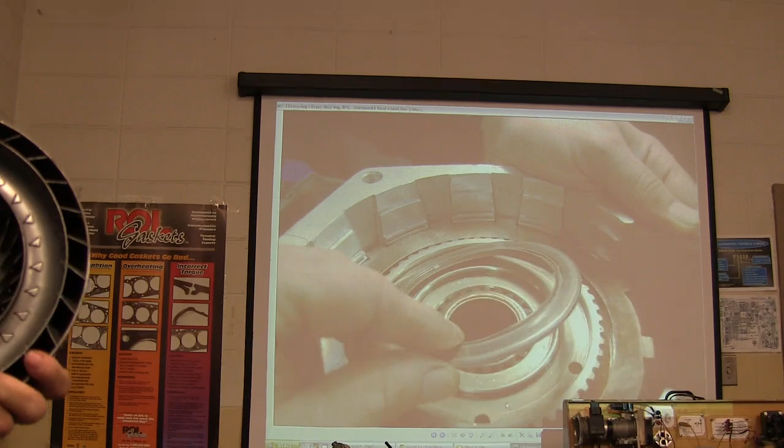Make sure you recognize the fact that the turbine shaft goes here, right? The turbine shaft, the little shaft that comes out the front. If a transmission is built the right way, remember this when you put that one back together, you ought to be able to grab that turbine shaft with your hand and turn it. If it's locked up and it won't move, then you're going to go back in there.

This one here, something else that happens, these splines get stripped. You can totally miss that. It won't show up on the turbine shaft. The turbine shaft is harder than this thing, typically. If it wipes this out, where does all of that metal go? Where does the oil go when it leaves the torque converter? Where's the first place it goes?

Nope. It goes to the cooler. Because where's the heat in an automatic transmission created? In the torque converter. Because it's shearing this oil, right? Now, you ever see somebody sit out there in a traffic jam on a hot day for a long time with a car in drive, and all of a sudden it starts puking transmission fluid out? Why would it do that?

Well, because it's shearing the fluid, and it gets hotter and hotter and hotter because they're in drive. And the hotter it gets, the more it starts to boil, the fluid starts to expand more and more. The next thing you know, it's puking out the vent and going all over the road. And they said, oh no, I've developed a transmission leak. Well, basically they're cooking the fluid.

When the fluid starts to get hot, like if you're pulling a heavy load a long way, and it's having to shear the fluid a lot, that fluid starts to change properties. And it starts to plant varnish all over everything. And it starts to get stinky and smelly. And it starts to cause valves to stick. And there's just all kinds of stuff that goes crazy.

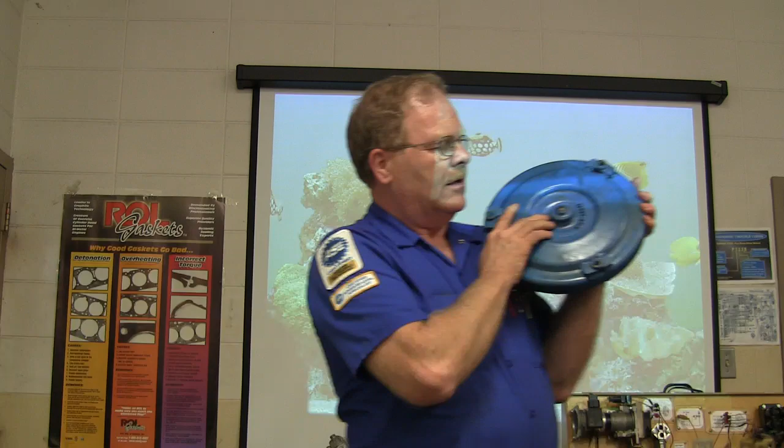You see, sometimes, well, right here, where does this go? This is the torque converter. Where's it go? It goes into the transmission and the pump. That's right, and this slot here turns your pump, right? Okay, so if you ever pull an engine out or a transmission out for whatever reason, like if you got to pull a transmission out, you got to put a rear main seal in the engine.

And this transmission, this is an older vehicle. This is the seal around here, right? And the torque converter has been supported because it's bolted to the engine. Well, now you leave your transmission sitting over there while you're waiting for your parts. A lot of times it'll distort that seal. So you need to pull this torque converter out of there and make sure that that seal is okay. Might not be a bad idea, just go ahead and put one in it.

But on the ones like you guys are working on over there, that front seal that goes around here, it's got a little sort of a cage thing that bites into the front of the pump you put on there, because if you don't put that back on there, the pressure that's behind that seal will blow that seal out of there every time. So what you got to do is make sure you put that cage back on there and it's staked really good.

The seal, and that's on the 4L60E like you're working on. That'll blow that seal out of there. It won't do that on any other transmission I know about, but that 4L60E is bad to do that. And so that's the deal on that. However, I got another picture here I want to show you. If I can get past my fish.

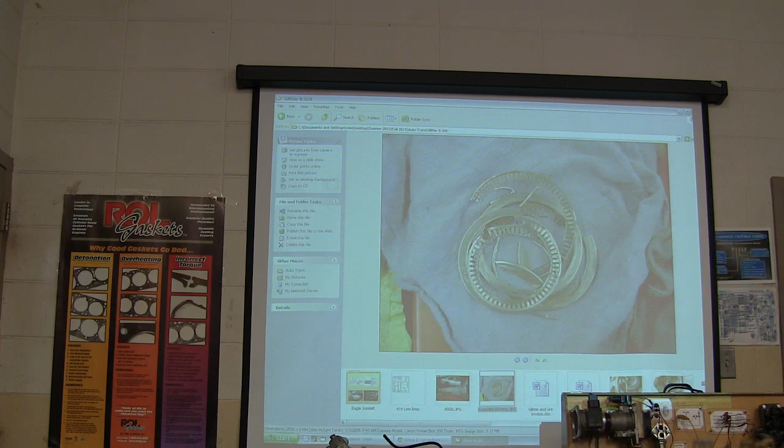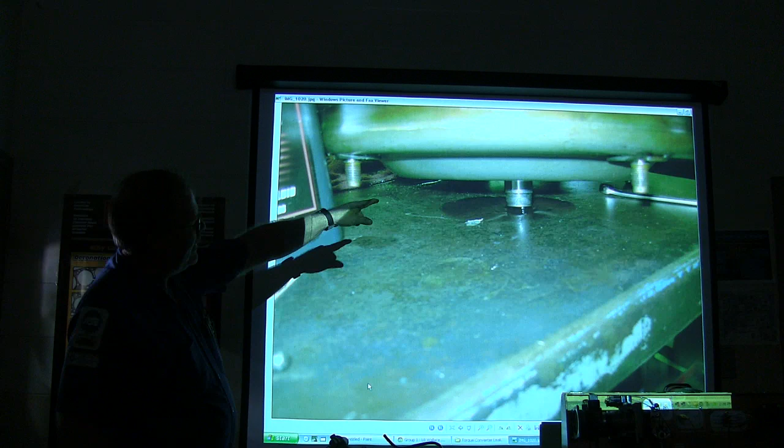Because when I was at the Lincoln Mercury place in 1984, there was a guy that worked and worked and worked on that. And he had a torque converter that was leaking that he would have sworn was the front pump seal. Well, what do you see about this? That torque converter, that goes up in the back of the crankshaft, right? Or up in the, you know, where I'm talking about the flywheel. This is the flywheel end of that thing. See it leaking there?

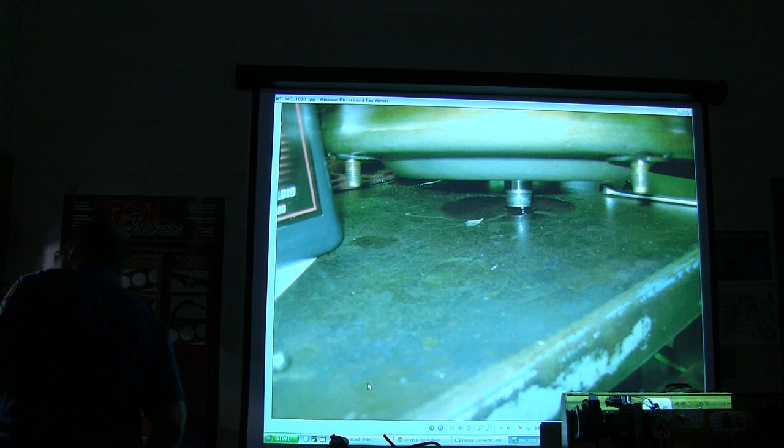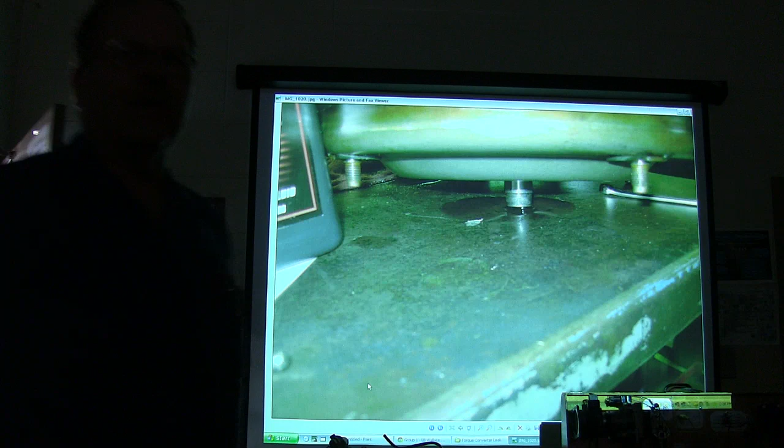See it leaking? I'm in here doing a little talk here if you want to come in. But right here, where do you think that leak's coming from? We laid the torque converter up on the bench. Do you see any oil anywhere else? It looks like it's coming out the end of the shaft and goes up in the motor. It actually is. There's a crack there. Right?

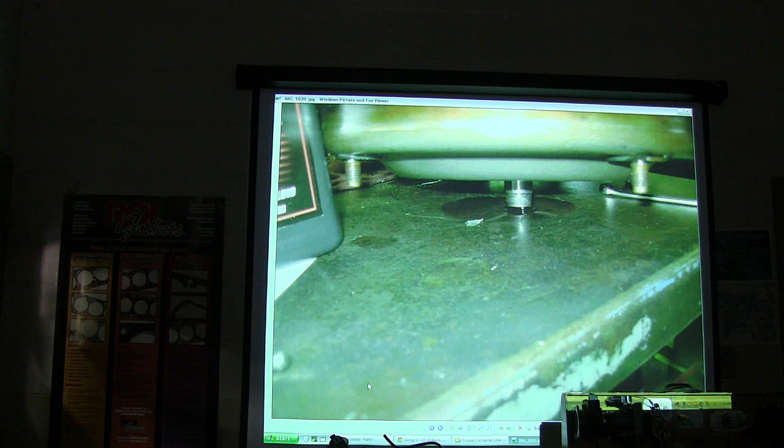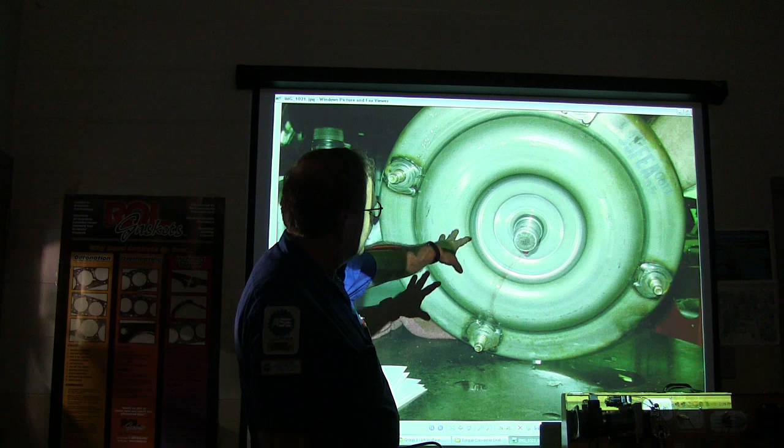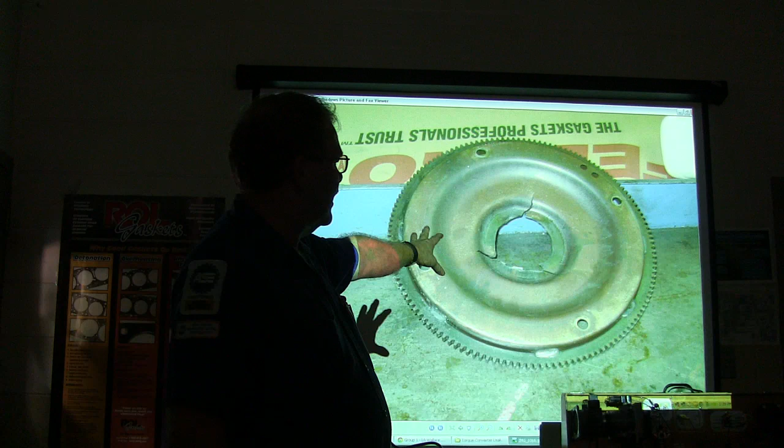See that leak? Drive you nuts. You can't see anything except that there's fluid there. That's how fine that little crack is. All right? That's why it did that. Now what happens is sometimes that flywheel will crack like that, and the torque converter loses its support. But it'll still keep driving because that's a ragged sort of a crack.

And what is another name for this part up here that you're looking at? What else do they call it? Got another name for it? Flex plate. Why do they call it a flex plate? What happens when the engine starts spinning this? What's that going into? That's going into the pump. What's the pump doing? Where's the first place the fluid goes when it leaves the pump? The very first place the fluid goes when it leaves the pump is in here. And it goes in there with a heck of a lot of pressure.

Now you got a pressure control solenoid, and you've also got a pressure relief valve, which basically is going to keep it from going too high. But as thick as this is, and that is a thick piece of metal right there, in case you hadn't picked this thing up, that's pretty darn thick. I mean, it's thick and it's heavy. It swells the converter a little bit. And when it swells the converter a little bit, it flexes that plate. And as it flexes that plate, it winds up

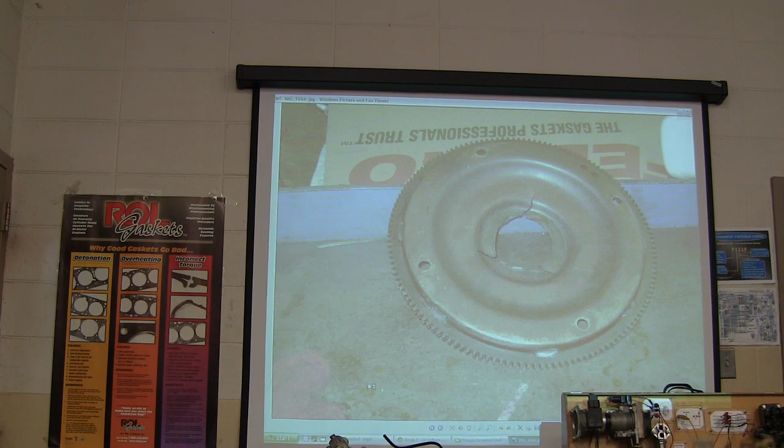cracking flywheels. Every one of these is a cracked flywheel. There's you a cracked flywheel. Hand that one there to somebody else. That's a cracked flywheel. And that's a cracked flywheel. Every doggone one of these flywheels is cracked. And they were cracked because the torque converter continued to expand around where it's bolted to the crankshaft.

And what you're going to hear before you do anything else is a click, click, click noise that sounds like an engine noise that's up in the bell housing area. If you listen with a stethoscope into the bell housing area and you hear a clicking noise, this is what you're hunting. Now the one with the arrows on it, right over there, came out of a 2000 model Chevrolet pickup with a 6-liter in it. That's a Silverado. Jimmy Hutto drives it. It's his personal truck. The simple fact is, he was hearing a noise he thought was an engine noise, and it was a flywheel noise.

So you can see them little cracks in there. This one here is an extreme case of it. But if it cracks the right way, even if it breaks completely out, you're going to have more. That's the truck right there. That's the black truck that it came out of.

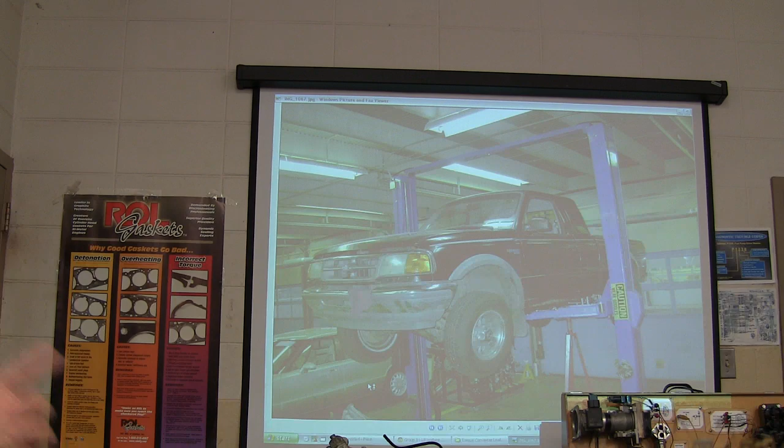Now, another thing that happened, the center was busted out of that flywheel, but when they took the bolts out, whoever took the bolts out fooled around and left the doggone busted off piece of a flywheel up there, and then put the other flywheel up there on top of it. That caused some trouble too, you can imagine. So it had to come back out. But anyway, that's the one right there. I was going to show you about that. Okay. That torque converter was bound up in it. I didn't realize it. Yeah. Well, that's right. It did. I mean, that's what I'm saying.

All right. So here's another one. Now this one right here is a different deal. My boy Jimmy was working on this one over at the Ford place. This is another war story. I know you guys love war stories. And there was a Lincoln that came in there.

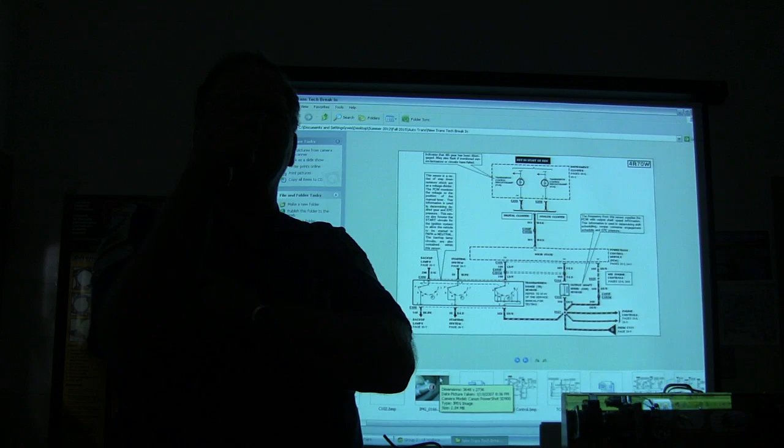You know this overdrive cancel switch on the end of the stalk? What does that do? What's that for? When you pull in a trailer? Huh? You pull in a trailer, it cuts... Oh, what exactly does it do when you push that button though? Disengage. Takes out a gear. Anybody know? I'm probably gonna hit you guys tomorrow with another one of these draw on the board and tell me things, so be paying attention. Okay, when you push that button, that light comes on, doesn't it? Does that button turn that light on?

No. The button actually sends a 12-volt signal to a particular pin on the engine controller. The engine controller receives that signal and then turns the light on. So you're not turning on the light when you mash the button. You're telling the engine controller to disengage fourth gear, which is your overdrive gear, right? So that you won't be overloading.

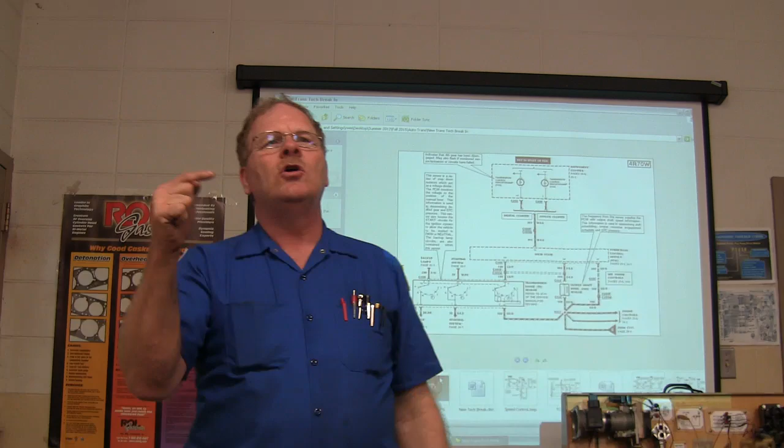What happens if you're driving a car and you're in too high of a gear? Burns up. Well, it just has trouble. You know, the engine's actually overstraining. It's not in its power curve. You want the engine to stay in its power curve, so you want to stay in a lower gear so you can pull the trailer better. Basically you don't want to put any undue strain on any components.

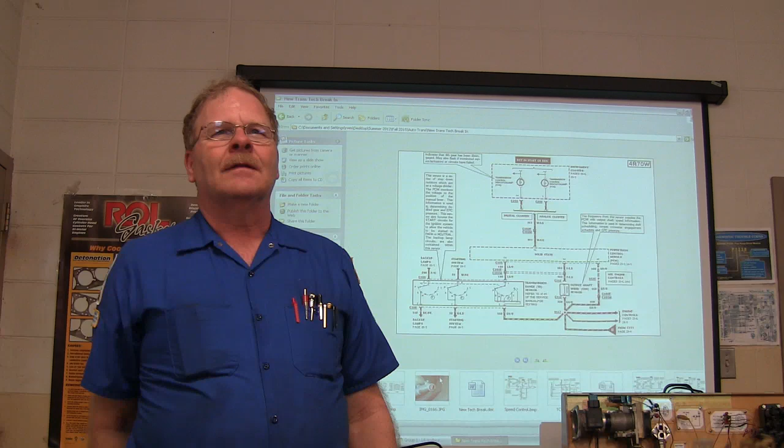Well, listen, he's got a Lincoln that turns on its own overdrive light. When you mash the button on the end of the stalk on that Lincoln, like if you're in hilly country, driving in mountains, you basically want to turn off overdrive so it's not hunting all the time, right? Okay, so you push that button, but the Lincoln driver is not pushing the button, and the light's coming on by itself. Is it the button line or PCM line? Well, the button ain't being pushed, but the PCM.

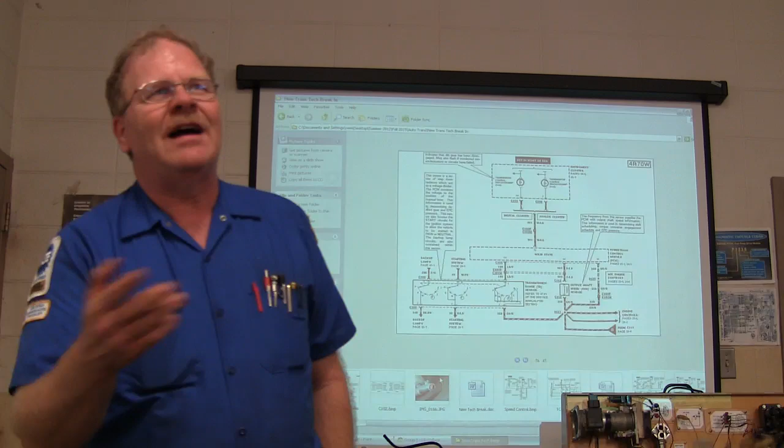So Jimmy's checked everything he could, wire harnesses as far as he could tell and all that. And he's scratching his head, and he gets a PCM. Plugs it in there, drives it around. Before he's been driving it for 30 minutes, the light comes on again. Now, how much would you pay? Like the pitch man says. We've already sold a PCM we didn't need, and we got the same problem we had. And this is not something that's going to escape notice. If they're driving and they look over at that overdrive light and they didn't push the button, it's back on. You're never going to believe what he found.

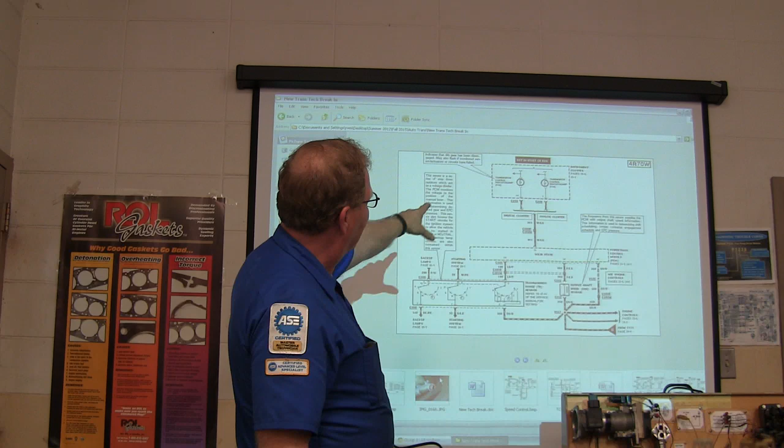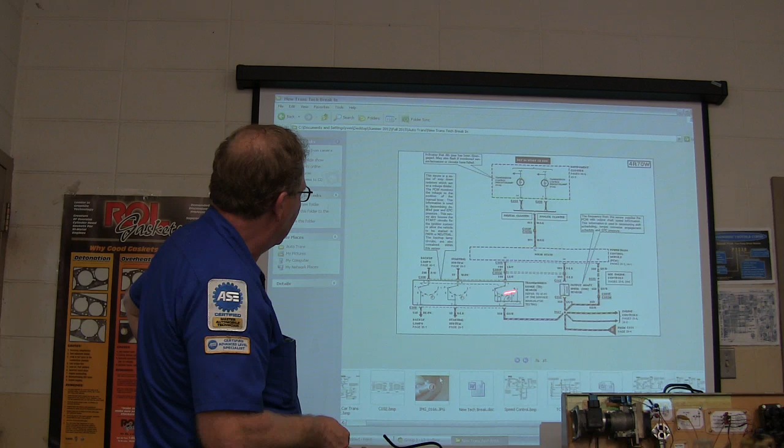He's tracking the wire harness. See the wire schematic right here? There's your transmission control indicator lamp. Now you might notice this represents alternate current paths, like for an analog cluster or digital cluster. Powertrain control module. Okay, so this indicator lamp, there's the switch here. Where's the switch? We're missing a switch somewhere. See a switch?

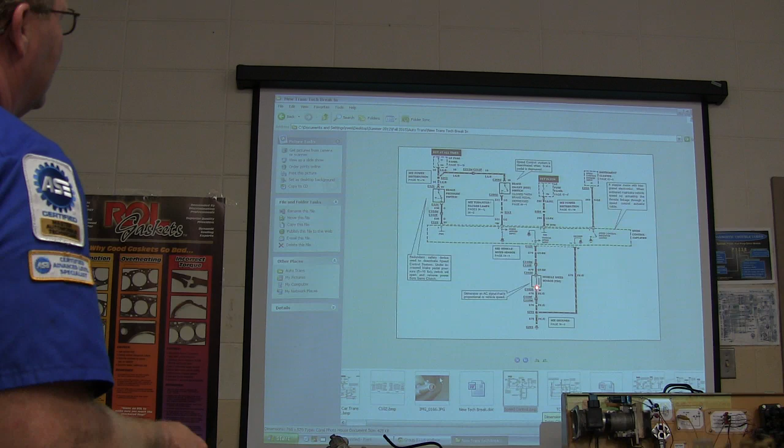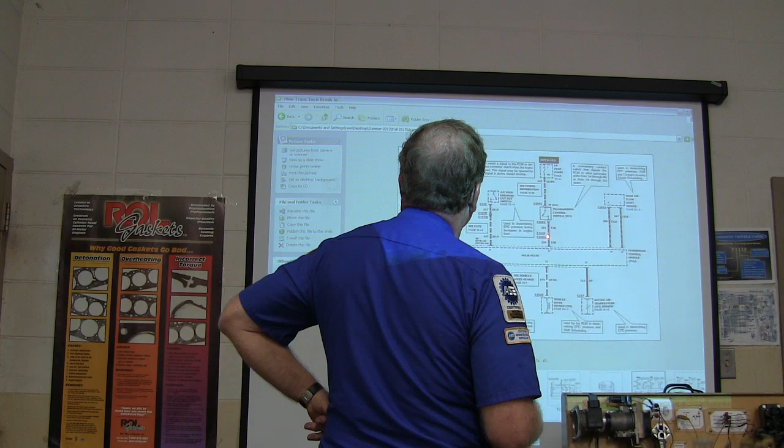Gotta find a wiring schematic with the switch. We see a switch here. Brake pressure switch. Vehicle speed sensor. That's not the switch we were looking for, is it? All right, you see the one that turns off the transmission control switch. There it is. You see this connector number, C102F. See that? I'll show you what he found. When he found C102F, it was down there by the wheel well.

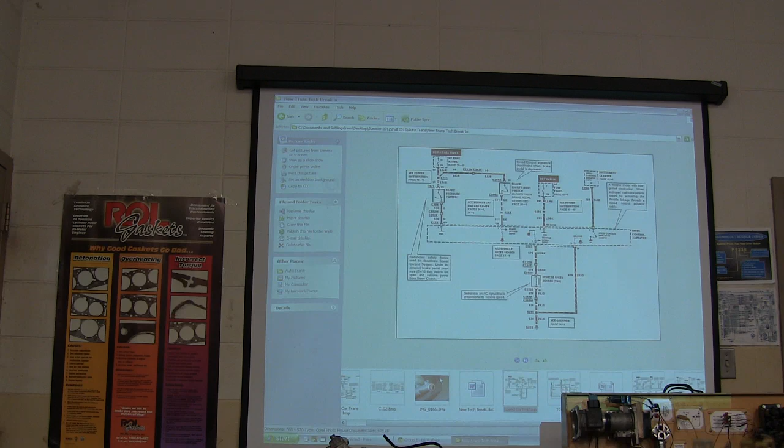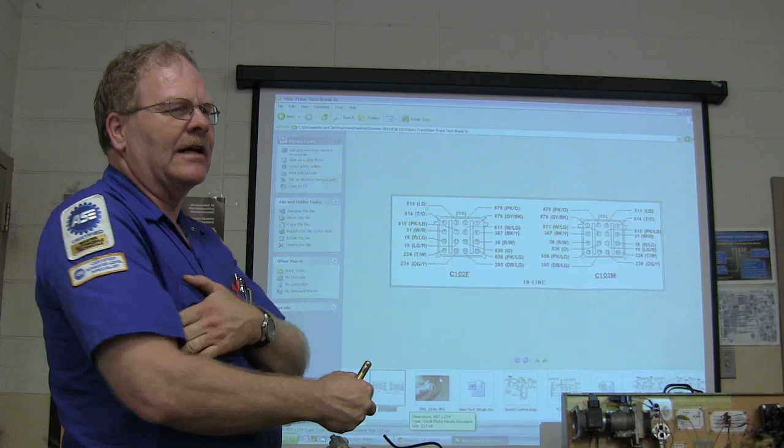This is the connector that he had. See C102? See all of these wires going through C102. How many wires are in that connector? Somebody tell me really quick. 16 wires. These are both the same connectors, male and female, they plug together. Okay, so the long and the short of it is, when you unplug this connector, and it's a weatherproof connector, it's got seals in it to keep water and splash out, because it's actually exposed to the elements.

It was full of something that looked like dirty water. Got it? He says, man, that sure is some dirty water in that connector. But then when he got it on his hand, it was brake fluid. Okay, so when that thing is this far from the master cylinder and nothing else in there is wet, how did he get brake fluid in that connector, which is causing a short between two of these terminals and causing that overdrive cancel light to come on? Someone changed brakes before? No, I'll tell you what it is.

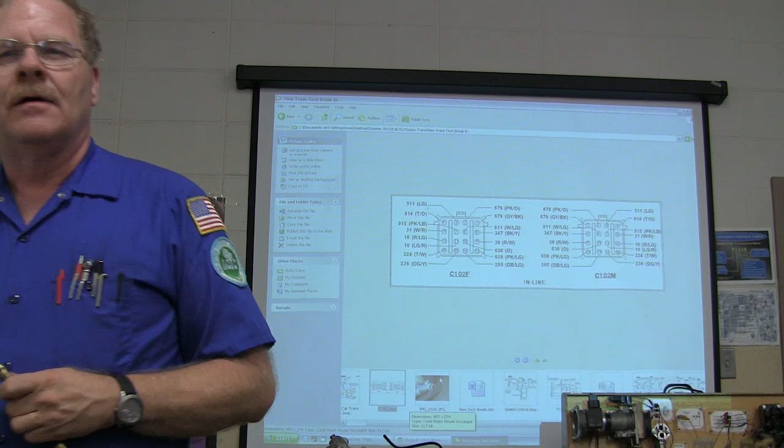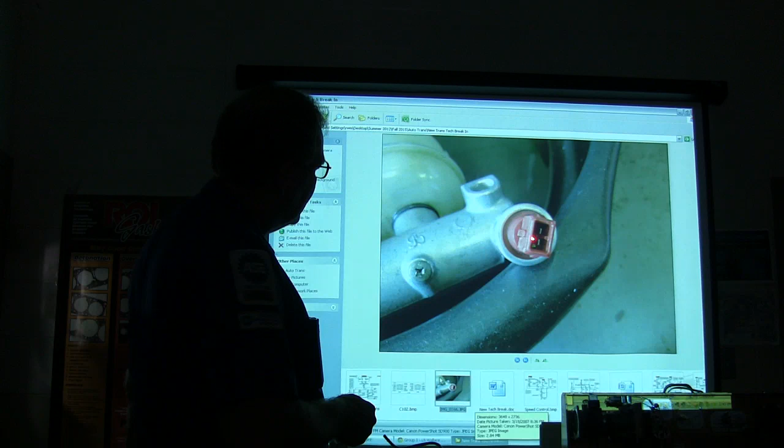Let me see if I can get here. See that switch right there? That switch screws right into the high pressure part of the brake. That is actually to cancel cruise control. It's one of your redundant cruise control cancellation devices. Those things tended to go bad and start leaking, because how much pressure is in there? You can have a couple thousand pounds of pressure in there.

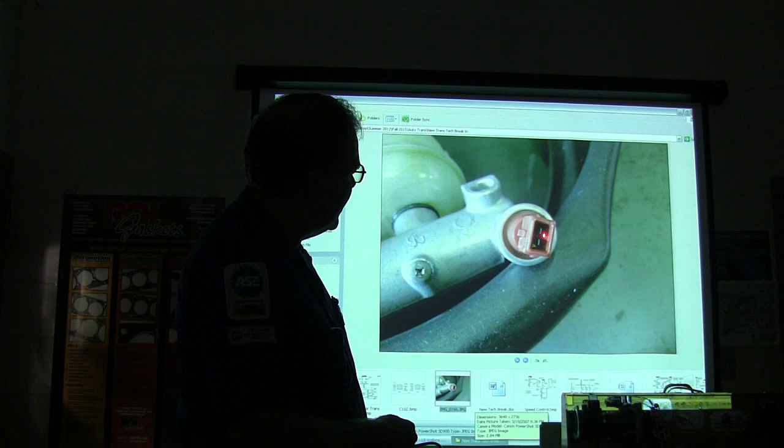This thing starts leaking, brake fluid goes in here, that's a sealed connector, and now that wire has become a piece of pipe and it's carried that brake fluid all the way through the insulation in that wire, all the way down into that connector, and over time, every time somebody mashed the brake, it would pump a little more brake fluid down there and that connector started to fill up.

Now, I don't think you would come down too hard on that boy for putting a PCM on there, because who would have ever thought of something like that? He wasn't seeing it anywhere until he unplugged the connector, because he was thinking, well, the power and the overdrive cancel signal both go through the same connector on the way to the PCM, so perhaps we got an issue there. That's why he unplugged it and looked at it.

You understand what I'm saying? All of this stuff goes together. We're talking about brakes. This is brakes and transmission coming together, right? It's a crazy job. All right.

War Story City. I don't know why I keep X-ing out of that folder instead of just hitting back up. That's silly. All right. There we go.

Can that happen with any other connector? Huh? Can that happen with any other connector? It can happen with any connector that's a sealed connector. It's weatherproof. It's got a seal around it. And you'll see the connectors with little rubber seals in them. That's made to keep water and everything out.

And any connector that can have pressure in it, like some of the old GM cars used to have an engine coolant sensor that would begin to leak coolant through the sensor, and the sensor would push coolant over time up through that wire, and where did that wire go? Where do the engine coolant temperature sensor wires go? To the PCM. So they start having all kinds of crazy problems. You pull the PCM off and you're pouring antifreeze out of it.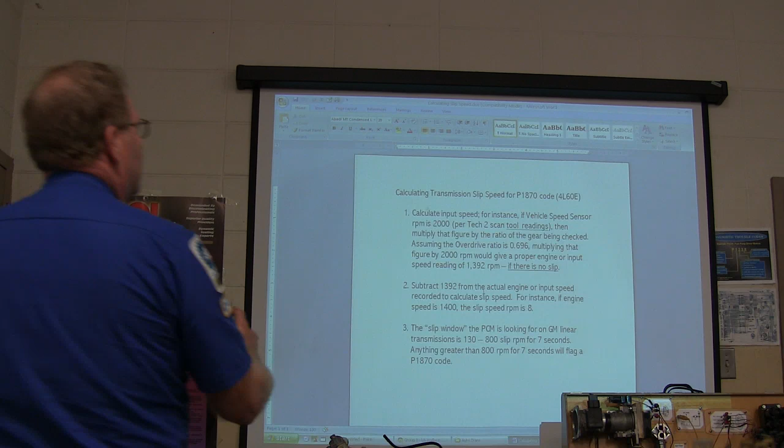All right. Now this is something else I want you to look at. This is a nice calculation thing, because Amber loves doing calculations on the computer. She's been working on one of those right here. Okay, we're going to calculate transmission slip speed for a P1870 code on a 4L60E. Calculate the input speed. If the vehicle speed sensor RPM is 2,000 per Tech 2 scan reading, you multiply that figure by the ratio of the gear being checked. You have to know what the ratio of the gear is, but you can pull that up.

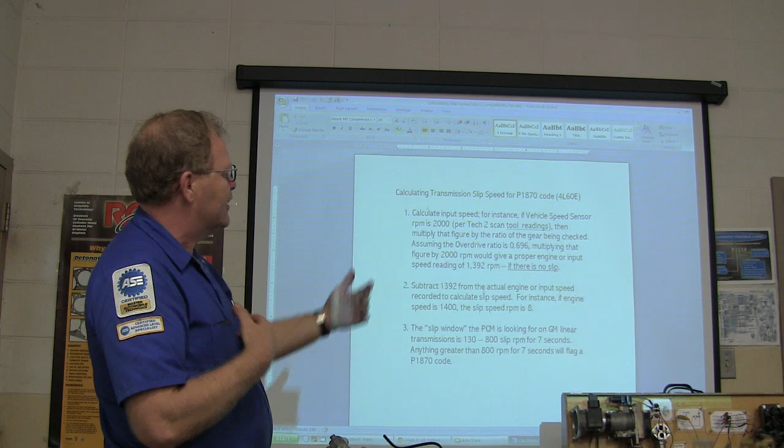Assuming the overdrive ratio is .696, which is pretty much right for overdrive, multiplying that by 2,000 would give a proper engine input speed reading of 1392 if there's no slip. Subtract 1392 from the engine speed recorded to calculate the slip. If the engine speed is 1400, the slip speed RPM is 8. Everybody got that? Everybody want a copy of that handout? You may need it, right?

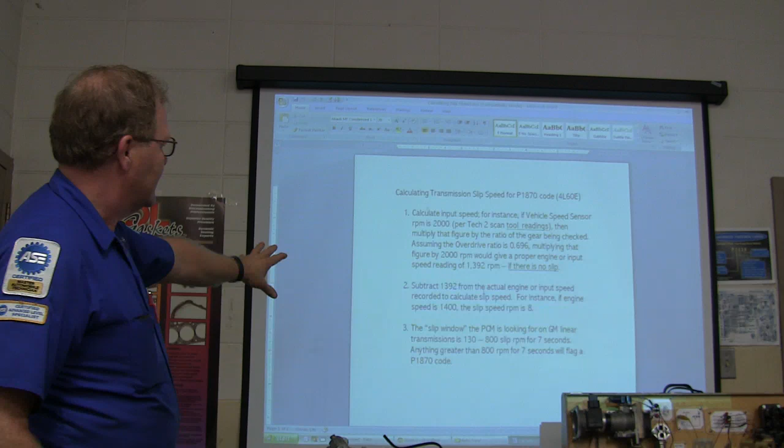The slip window the PCM is looking for on GM linear transmissions, linear means it runs front to back and it's got a drive shaft, is 130 to 800 for 7 seconds. Anything greater than 800 RPM slip for 7 seconds will flag the P1870 code. This code keeps coming back, right? You got issues with that.

Speaking of codes, my son Luke has a, who knows what a P0125 code means? You remember from last semester? P0125. That means that the engine's too cold for it to go into closed loop, right? Thermostat, right? Remember that code? Some of you dealt with it. I don't memorize the codes though. No, P0128 means the thermostat's opening a little too soon. P0125 means it's opening way too soon. I don't memorize them all myself, because there's about 10,000 of them.

But the long and the short of it is, what's a 700 series code? Like a P07 what? Transmission. Got me? Anyway, the P0125 code, he put a thermostat in it. He says, it's still running too cold. It came on again and threw me another 125. So he puts another one in. He says it came on again. So he went and bought a thermostat from Toyota. And he's asking everybody he knows that's a mechanic, including me.

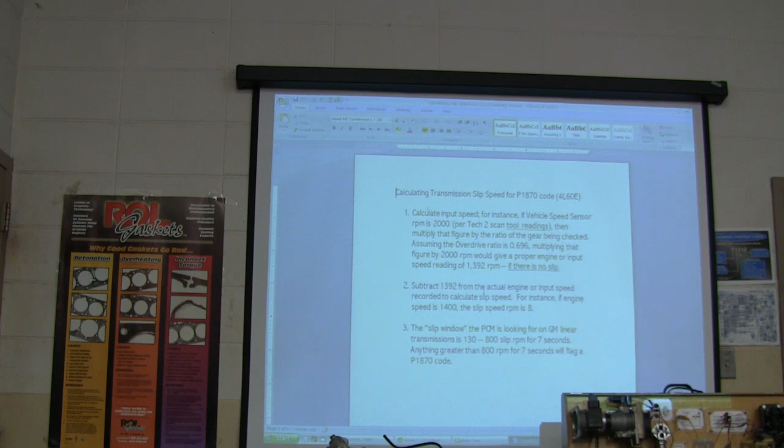Well, you know where I found the answer for his problem? I went to Identifix. You know what Identifix said? If the oxygen sensor heater is burned out, and the oxygen sensor is not switching because it can't get warm enough, it'll throw you a 125 code. Badly written software. It should have a code telling you the oxygen sensor heater is burned out. And that's what he found. See what I'm saying? All right, long and short of it is, now we're going to talk a little bit about, this is a heavy duty